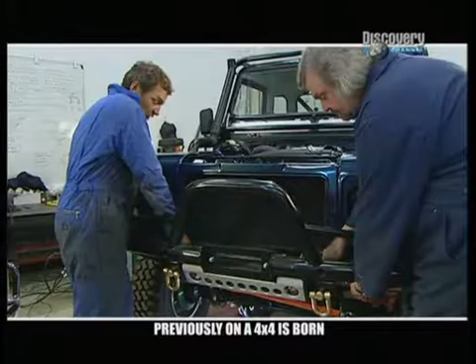Pete, mate, do not play with things you don't understand.

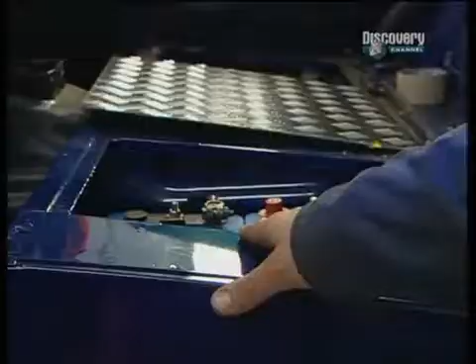Now, in here, you'll see we have not one, but 2 batteries. It's a bit like a boat, so we have an engine battery and an auxiliary battery, and we will be fitting a special split charging system a little bit later on. I'll show you that later in the series.

But for now, I'm finishing off my old door panels. Bit of sound deadening to stick on the back here like that. That will fit in there like so. It's quite flimsy, this panel, so a little bit of sound deadening will help. It's the kind of stuff you have on the inside of your doors. So in it goes.

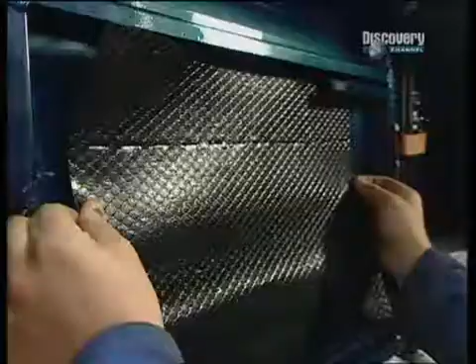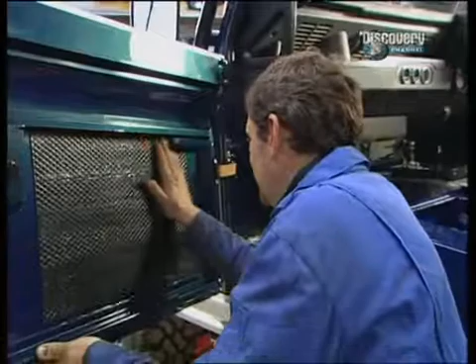It's funny when you're working on a vehicle like this, you suddenly find yourself doing all kinds of jobs you never thought you'd have. This was not on the original list, but I think it's definitely worth doing. The other thing you really notice, particularly at 3 o'clock in the morning, is how it's all those little jobs that seem to take forever. I must have spent an hour and a half or 2 hours just clipping pipes in the engine bay. It's not a very interesting job, but it has to be done. So there we go, that's that.

Then we got my panel. Basically the same as before, but just put some of this sticky back foam on the back to help seal it, and just countersink the old holes in there. That will drop on like that.

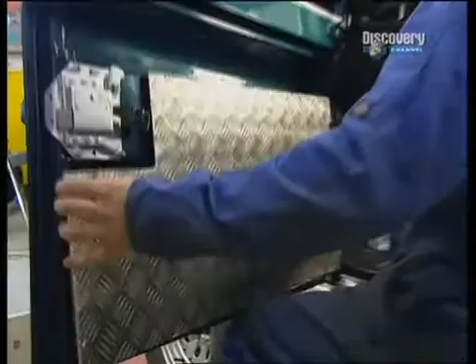Haven't finished on the doors yet though. I put those panels on the inside so that Pete, mate, doesn't kick a big dent in my doors. But also, I've got to reglaze the remaining window top, which is this bit, detachable top from a Series 3 door. Now, I don't think I ever showed you how bad the original doors were that I was going to steal from my little 90, OK? They were the wind-up windows, very trendy, some would say. I don't particularly like them myself because they don't smack of the kind of old Land Rover thing that I like.

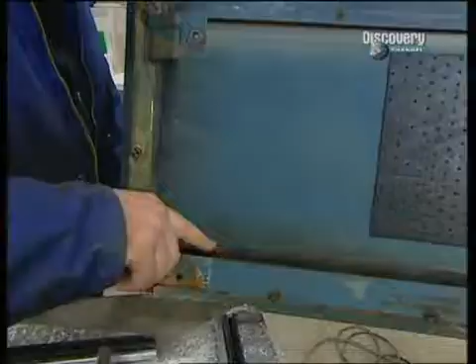But this is a door that we took off. It didn't look too bad until we took the interior panel off, but then things started getting a bit dodgy down here, and this is just knackered. Now, it is rebuildable, and these are very expensive items. If you try and buy replacement new versions of these, you'll part with a lot of cash.

So, at some point, we will sit down and repair these, because we all know how good Les is at making brackets and things, don't we, Les? Yeah, but very slow. But very, very slow. It takes him days and days and days.

So, Pete... are we done with this? No, just stay there a little bit longer. OK, so we're going to put it together. All we've got in terms of the door is the old sliding windows, all right? So there's 2 windows. There's that pane. There's that pane. And there's that pane. I was going to say that. Just remember whose show it is. Yeah, OK, I do the words, you do the directing. And by the way, can you go and put the little bumperettes on the back?

Thanks, Pete. OK. It's all a matter of felts and runners to put these windows in. There's 2 windows. The front one is a fixed window. That gets glued in place. And then it's the rear window that slides to be able to stick your elbow through it.

So the first thing is to put the bottom runners in. It's just held in by 3 self-tapping screws. So it just drops in there like that. They've been a little bit damaged, these runners, when they were taken out. It's not a job we did, but we're going to have to sort that out to make sure the window slides properly. Just locate those.

Right, OK. Now, plonk the window down. The next thing is to put a load of goo in. Now, this is a sealing window sealer, but it's also a pretty good adhesive as well, which is perfect for this job. Just need a nice steady bead coming all the way around, because you want it to squeeze out a little bit around the frame, so you can then clean it off afterwards.

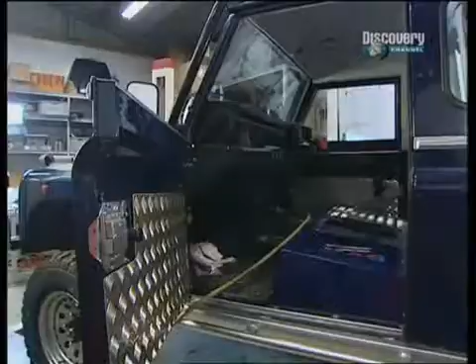Done it, Mark. And then the finished window just drops in these holes right through the door top. And all we've got to do is make sure that the rubber sits in the right place. 2 nuts is all that holds it on.

It's got a V6 Ford Capri engine in it, which is nice and short, and everything else is standard Land Rover.

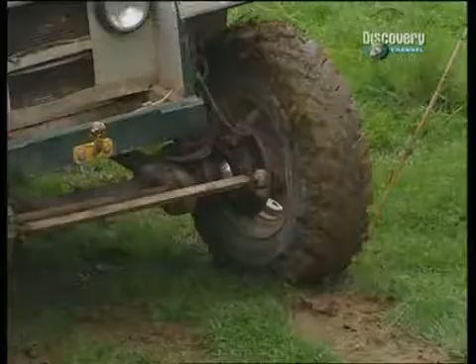This vehicle is more of a starter vehicle. If I'd changed the tyres today, it would have been more competitive on the earlier sections. On the last 2 sections, I got through more or less to the finish, so it was not that much of a disadvantage. The only advantage with it is that I don't have to do a lot of maintenance with it.

The club has a vast range of events. It goes from the safari racing, which is high-powered V8s and getting a lot more sophisticated, trick suspension and everything like this, right down to even now junior trials where 14-year-olds are allowed.

I've been involved with the All-Wheel Drive Club for now about 10 years. Previously to this, I was actually clerk of the course for the last 2 years on the Super Modifieds.

It's a form of motorsport which is not expensive. You can buy the bits cheap enough to put on vehicles and you can go out and have a day's fun. I have never been of the ultra-competitive type, but it's just, they're a great crowd here and it's just good fun.

Yes, indeed. The first time I've ever had a car seat with my name on. Pete Mate's got one as well, and he's very proud of having a seat with his name on too.

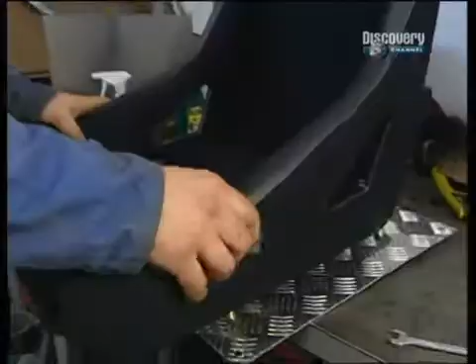So these are FIA approved internationally race seats, also MSA, Motorsport Association in the UK, approved. They're a tubular steel frame construction. It's padded and sprung all the way around, so it supports you brilliantly, and it will take a 5-point harness, so 2 through here, 2 through here, and then 1 up between your legs through there, which is very important to stop you submarining if you had a head-on impact where you kind of disappear underneath the seat belts and forward. Very light seat as well, which is really, really good.

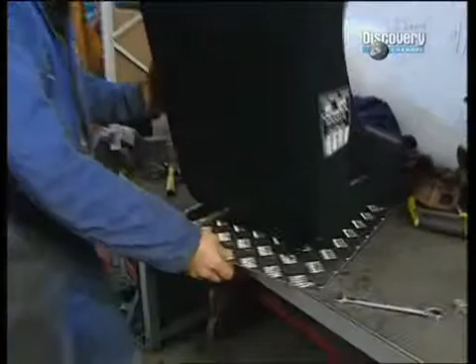Fixing them in is dead straightforward. We have the seat box already, which is one of the main parts of the bodywork in the vehicle, and all we've cut out is a piece of 5-bar tread plate. The seat runners, it's a fully adjustable back and forward seat, just bolts to the tread plate with 4 bolts and some spacers. These little spacers slot in underneath the runners.

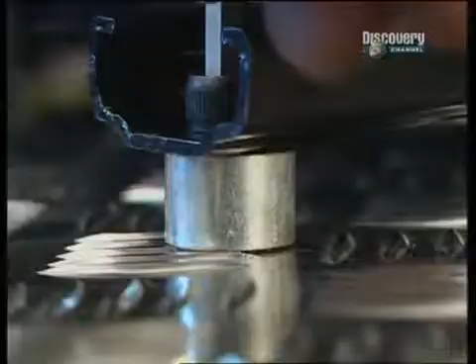The only downside we have, having a truck cab setup with this project vehicle, is the fact that we're not going to get as much aft movement in the seat as we would if it was another type of vehicle, which means that I'm not going to be able to push my seat as far back as I might like, but then I'm not very long-legged, so I should be okay.

Right. Just need to be a bit careful because the edges of this checker plate, or tread plate, are pretty sharp and they'll take all my paint off.

So it slots in back first. Now I've made it so it's pretty tight to this side with these little wings on here, so that I've got the maximum space possible in between for a cubby box, which can be a secure box in the centre.

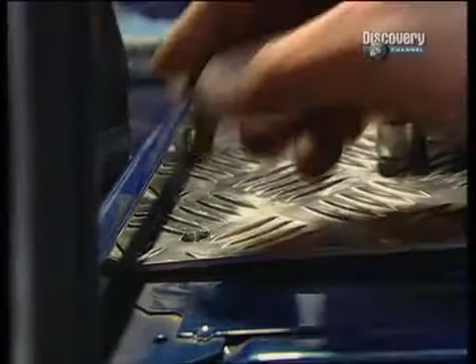So just shuffle my way a bit, and then it just bolts down in 4 places. That's one of the original fixings. But the other 2, the other side, we've had to drill holes through the bulkhead, and then we'll put some plates underneath to bolt it in. But if we just put them in place for now, Pete, if you can do that, then I can put the seat back and see if there's enough leg room.

That goes back, that's as far back as it'll go. Come and join me, come and join me.

Ooh, last time I sat in a seat like this, I was racing a car around a circuit. That's very comfortable, very supportive on the back, isn't it? Leg room's a bit confined, but Land Rovers are like this. It's not much better when you've got normal seats in a truck cab, to be honest.

We do need a very small wheel, really, which is a good job we've got power steering. Actually, who needs a steering wheel? We'll just put a set of mole grips on, and I can just steer it like that.

Just close the door, see if it cuts the noise out. Don't close the door? No, because the door might damage... fall off. No, because it might damage the paint, but we've got to adjust it. He just wants to try everything. Where's the windscreen wipers? Can't we get those going? Well, funnily enough, normally you find them on the outside of the windscreen.

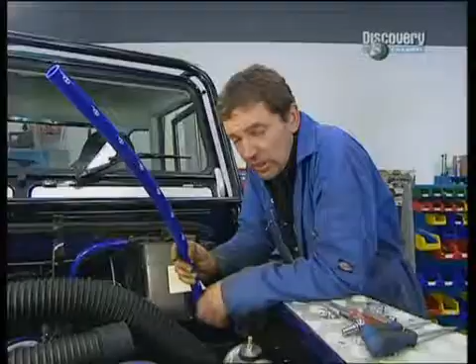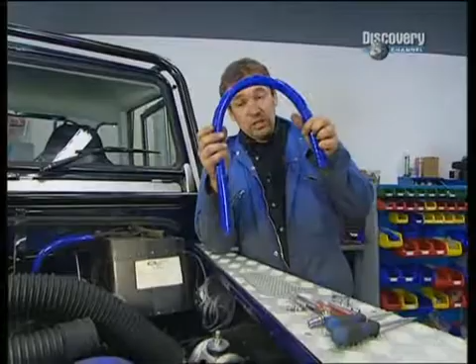Next job is to sort out the suspension geometry and wheel alignment and so forth. My mate Ian's putting all the technical gear on the wheel so we can do that. Meanwhile I'm trying to add all the bits I couldn't put on before because I didn't have them, such as heater hoses. Also, take a look at this - I've put on the headers and Y pipes that have come back from ceramic coating. They look absolutely brilliant. If they perform as well as they look, we're in for a big treat.

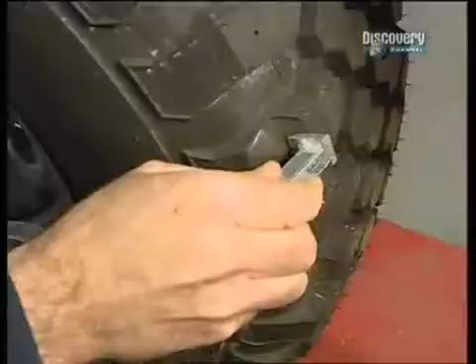We're set up for suspension geometry and wheel alignment and all that kind of malarkey. Now, I've never done this before, but my mate Ian's brought along the kit and sorted it out for me so I can have a go. First thing you've got to do is find your icon on here, so we click that. 1981 to 1995, a Land Rover Range Rover Classic - that's the database we've now selected, and the computer will basically tell us what to do on the vehicle.

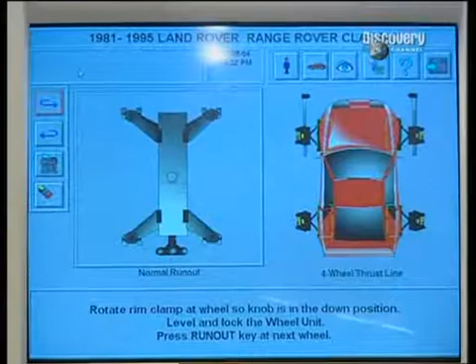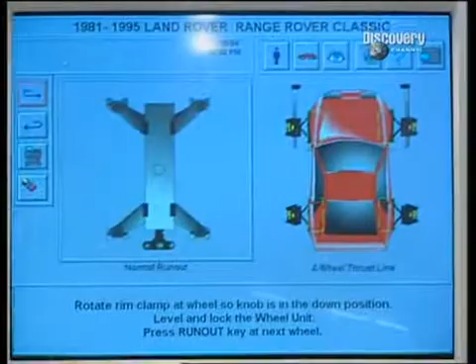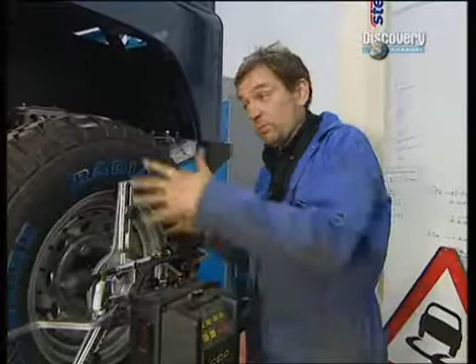So we've got the rear axle jacked up at the moment, and sensors on the wheels, and we've got to go around wheel by wheel, first checking a thing called run out. Run out is about whether there's any movement or wobble when you rotate the wheel. That could be because you've got a damaged wheel, or because this apparatus hasn't been put on correctly, so you need to set up the computer first to make sure it's happy with the run out.

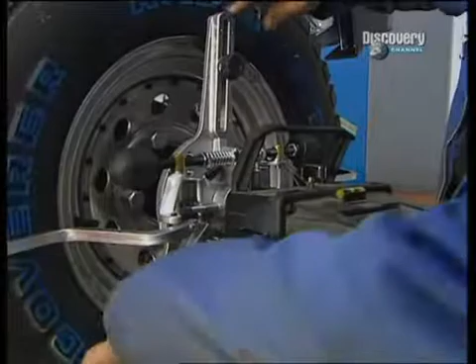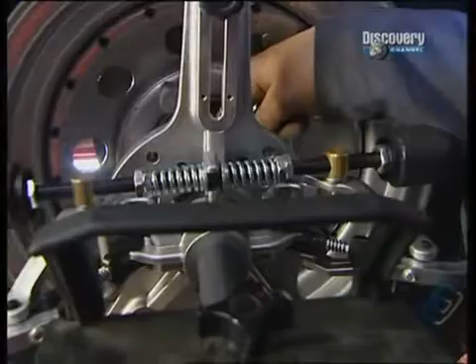Every wheel has got the same kit on it, a cradle with three pickup points, one, two and three there. The centre shaft should be in line with the axle, a straight line through there and through the centre of the axle. There's a little bubble so you can check the whole setup is level, and this machine has an infrared transmitter and sensor that creates a box around the vehicle by communicating with the other sensors. So you've got this infrared box, and the computer can tell where every wheel is in space within that box, and that's how it calculates all the parameters we're trying to look at.

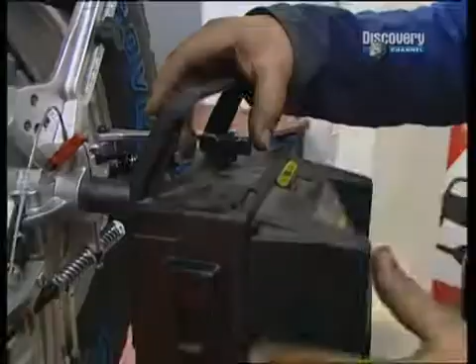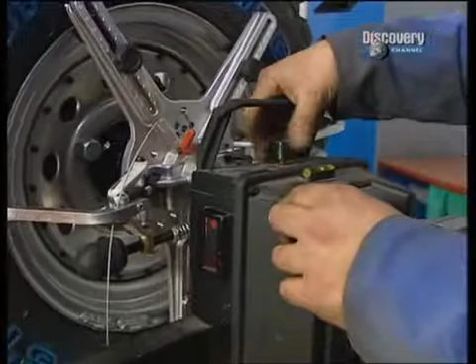To start with we have to do the run out. First job is to rotate the wheel so I know exactly where I'm starting from, because I'm going to rotate it again for the computer to sense. Then I need to set up the infrared sensor receiver so it's completely level with the bubble on top. Then all I have to do is press this button here, but very gently without joggling everything. Now, with that in that position, I can loosen this off and rotate the wheel through 180 degrees until this point is at the top, so I know I've gone 180 degrees - doesn't need to be absolutely perfect. Line up the bubble so I know it's all level again, and then gently press the button a second time.

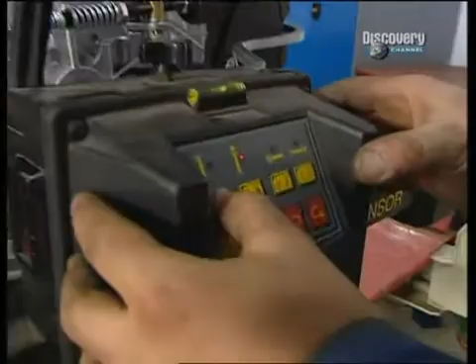And if it all comes up green, as it has, the computer's happy with that - the run out is acceptable. So I can just loosen off the clamp, and then I've got to do each wheel in turn, exactly the same procedure.

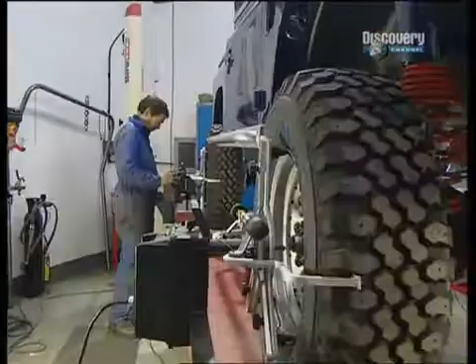Right, I've got 4 greens in terms of run out, so I can move on to the next stage, and the computer gives you all the prompts of exactly what you need to do. I need to put in now 4 of these turning plates under the wheels.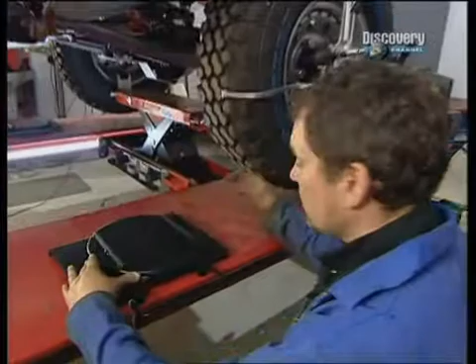You then lower the Land Rover onto them, and this means that when you're adjusting any of the parameters and the geometry, it allows the wheels to move in any direction because they can basically slip and slide in relation to each other. So that slides under there like that.

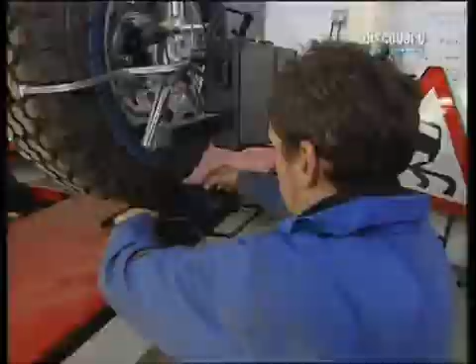I then need to put one of these turning plates under each wheel, lower the vehicle down onto them, give it a joggle to settle the suspension, then put a brake pedal depressing machine which holds the brake on before I can then go on and do the other test that the computer wants me to do, which includes doing a caster swing.

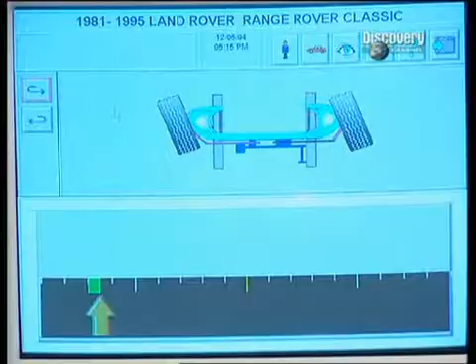Oh, that feels good.

Welcome back to my 4x4 off-road driving school at the Land Rover Experience Chilterns. Now, today we're going to be learning about how to drive across a side slope. It's something you want to absolutely avoid unless a dire emergency.

OK, so what is the technique for driving sideways across a slope? Very slowly. Make sure your passengers are out. People wobble about, so do it on your own. It doesn't hurt for people to be standing completely clear and walking, say, 100 yards. Do it on your own, and if anything goes wrong, you must turn down. If you turn up, that is what puts you over.

Hopefully you've got an escape route. Down is a safe place for you, not onto the motorway. And yet your natural reaction would be presumably to steer up. To steer up, yeah, the hill, because if you're on one side, you really want to get your head upright, your brain level, and so it's natural to steer up.

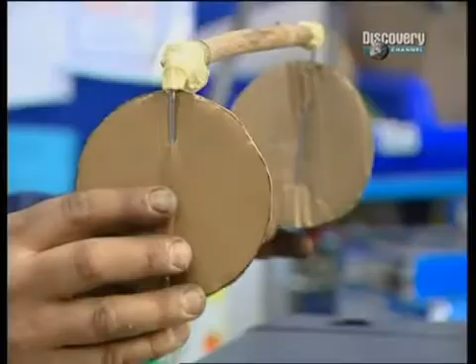Next one on the list is caster. Well, caster you kind of need to look at from the side, because if that's the axle like that, with caster, if you rotate the wheels like that, so the axle effectively rotates like that as well, you've got this angle through the wheel there. Going that way, it's negative caster, which is what you get on a shopping trolley at a supermarket. If it comes back the other way, you have positive caster.

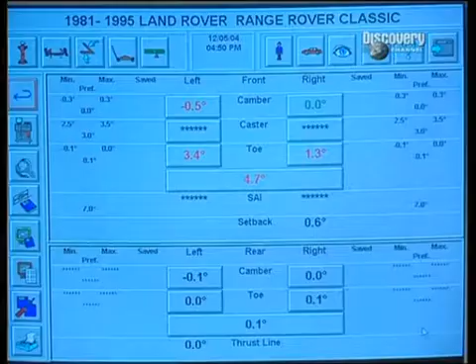OK, and the final one on there of the main ones is toe. Well, that's easy. If you look at the front of the vehicle like that, that's toe in, that's toe out. OK, and toe in is a positive figure because you could end up with lines across here making a cross, and a cross is positive. OK, I hope that helped.

SAI, steering axis inclination, is a kind of mathematical thing that's worked out from the camber and the caster, and I can't really explain any more than that because my brain won't handle that. But basically, in terms of the results, it's all pretty good news.

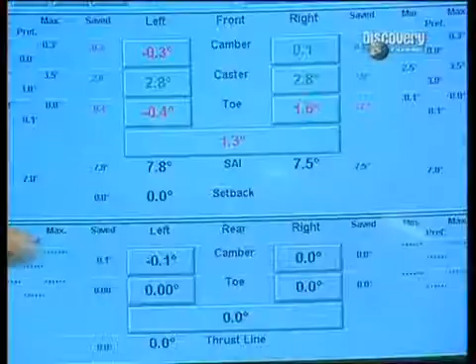On the front, camber and caster are OK, but the toe is not good, so that needs a little bit of adjustment, which I'll do in a second. On the back, camber and toe are OK, and thrust line is absolutely perfect. Thrust line is basically the centre line of the rear axle and the centre line of the front axle following in exactly the same path. So the rear wheels and front wheels are exactly parallel, so you're not having any crabbing going on.

And that thrust line is basically adjusted by our panhard rod across the front, which has got the rose joint on the end. So that's all pretty good. The only thing we need to do is the toe in, toe out on the front.

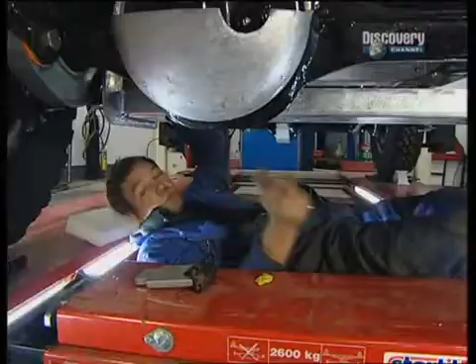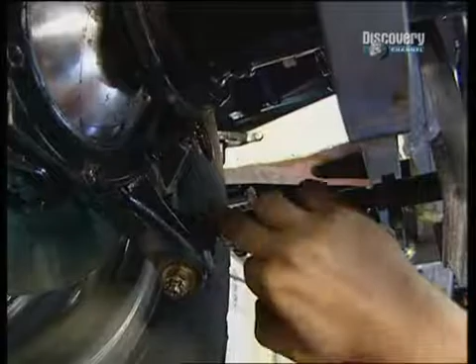So to adjust the toe in, toe out on the front axle, you have to play around with this adjuster here on the track rod. The track rod runs from one hub to the other right across the vehicle and has got a ball joint on either end. I've undone both the clamp bolts on this adjuster, and then all you need to do is get a big pair of Stilsons.

It makes a bit of a mess of the adjuster, this, I have to say, but you can always have a bit of paint afterwards, and then you just grip it and turn it. And as it turns on the threads, it effectively lengthens the shaft or shortens it, the rod, I should say.

I can actually see the computer from here, so I need to get a smaller number, so I need to rotate it towards me. OK, and we just got to keep going until we get down to 0 total and 0 on both wheels. Right, we're down to 0.1.

Right, here we go. Tell me if it gets to 0. It's coming, and it's there! Yes! Yay! Hooray! So that's it for now.

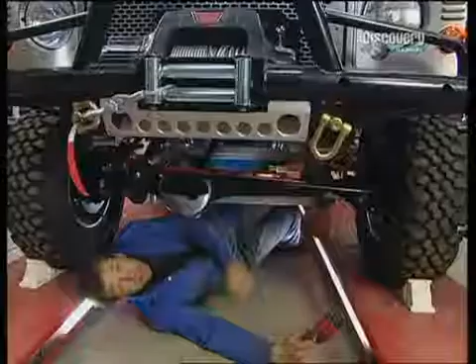Oh, bless him. It's the absolute finishing touches. This is so much fun, I can't tell you.